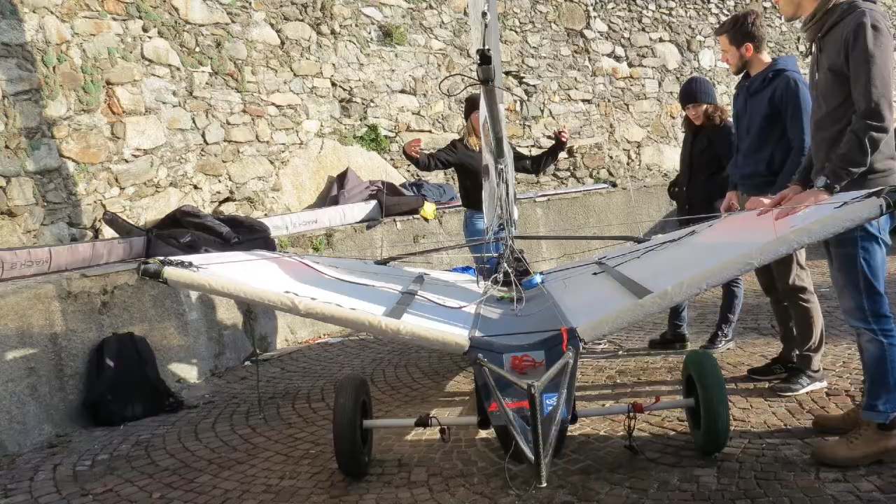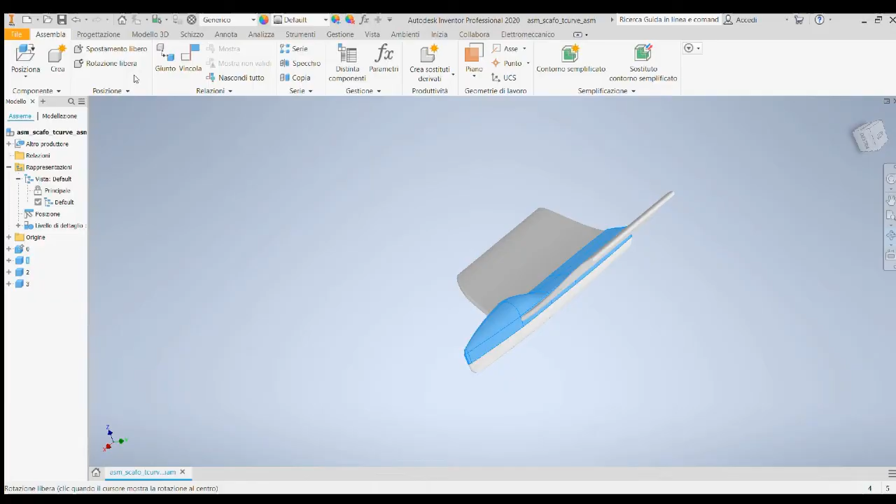The relations we built with partner companies allow us to use low-impact materials, such as bioresins and basalt fiber. Our design is based on small footprint, in particular from a perspective of reutilization of the parts. We take broken parts, we fix them, we test them, and then we use them in the new moth. We design parts and we want to produce them according to reusability, meaning that they could fit future moth designs. This way, we extend the life of each component.

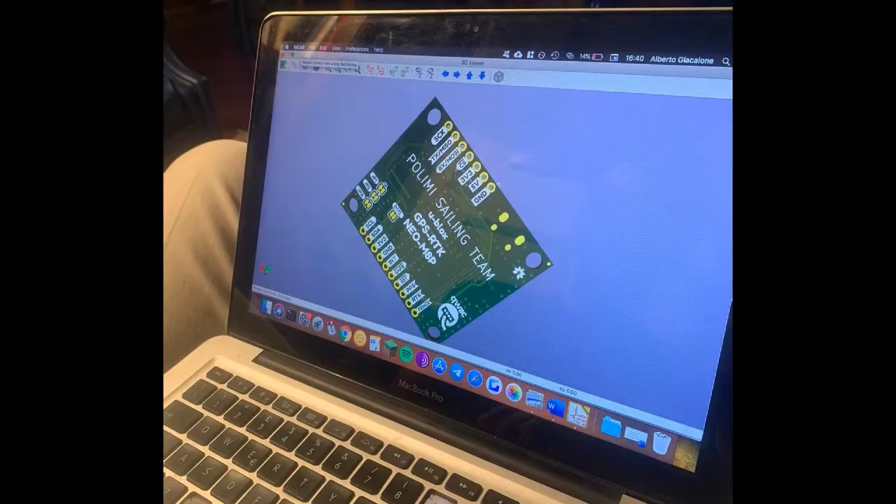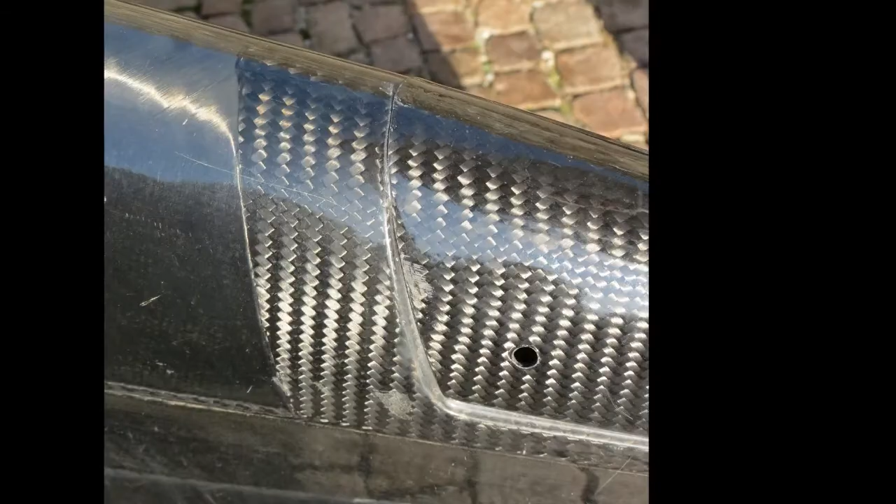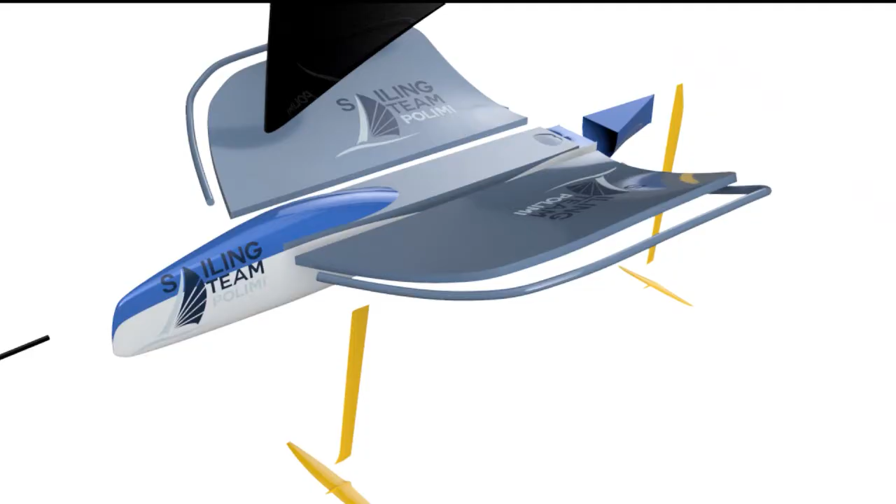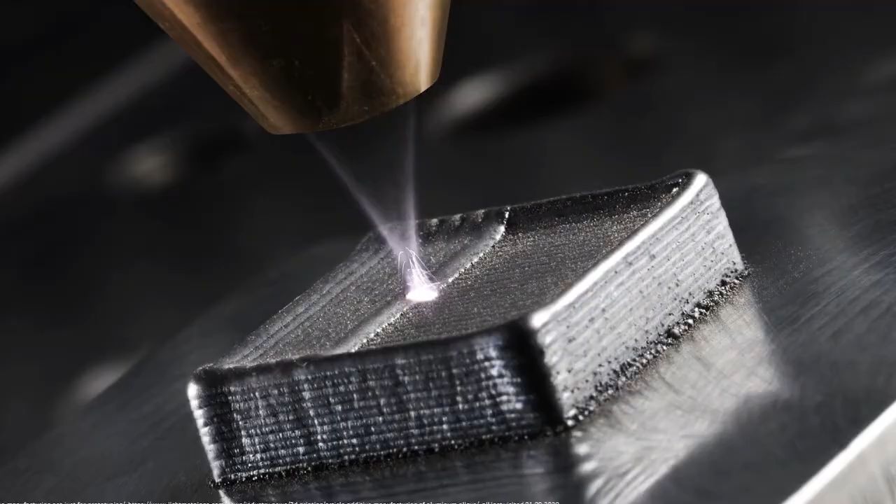Each moth module will be able to fit future moth design. This way, we forecast multiple lives for each of them. The joining techniques are designed to perform accordingly. For this purpose, additive manufacturing will be used to produce small joining elements to be inserted where needed to meet modules' geometries. Additive manufacturing, along with a zero waste approach, will involve sustainable materials such as aluminum and PLA.

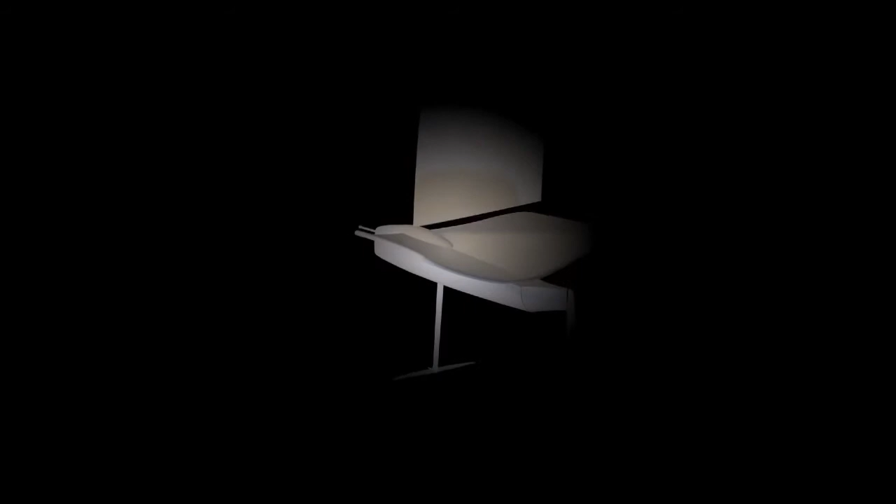Along with it, all moth modules must allow full disassembly for maintenance while in use, but focusing on our end-of-life sustainable disposal. Our moth will embrace innovative design solutions and manufacturing techniques, involving sustainable materials and extended end-of-life vision.

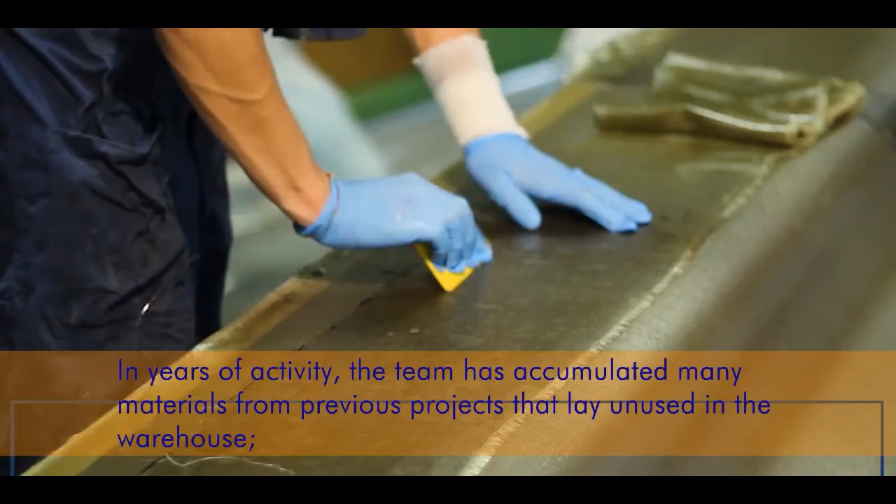Hi, I am Davide Sorli. I am a member of the Polito team and manager of our Sumoth project. In years of activity, the team has accumulated many materials from previous projects that lay unused in our warehouse. Our Sumoth has the goal of exploiting as much as possible these materials that would otherwise remain unused.

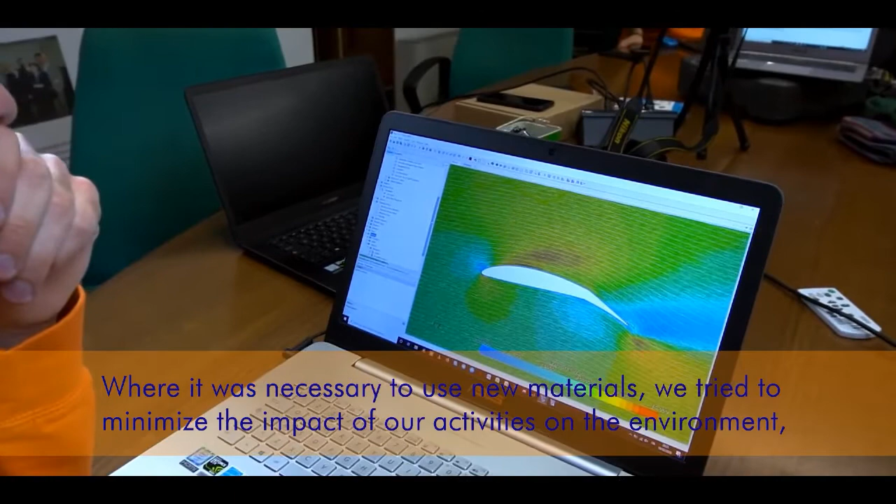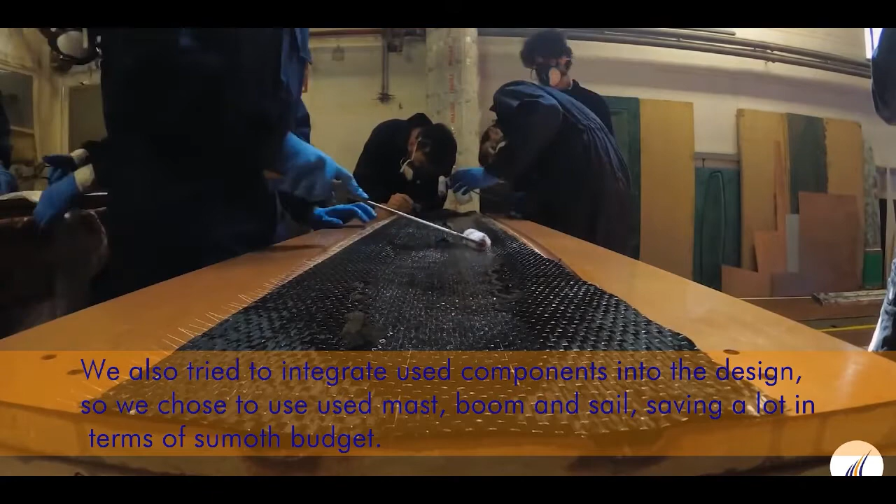Where the use of new materials was necessary, we try to minimize the impact of our activities on the environment, orienting the choice towards more sustainable solutions, like the use of a bio-based epoxy resin, which our team uses at every stage of the construction process. We also tried to integrate used components into the design, so we chose to use a used mast, boom and sail, saving a lot in terms of Sumoth budget. To fully grasp the Sumoth philosophy, we decided to also use materials that have reached the end of life.

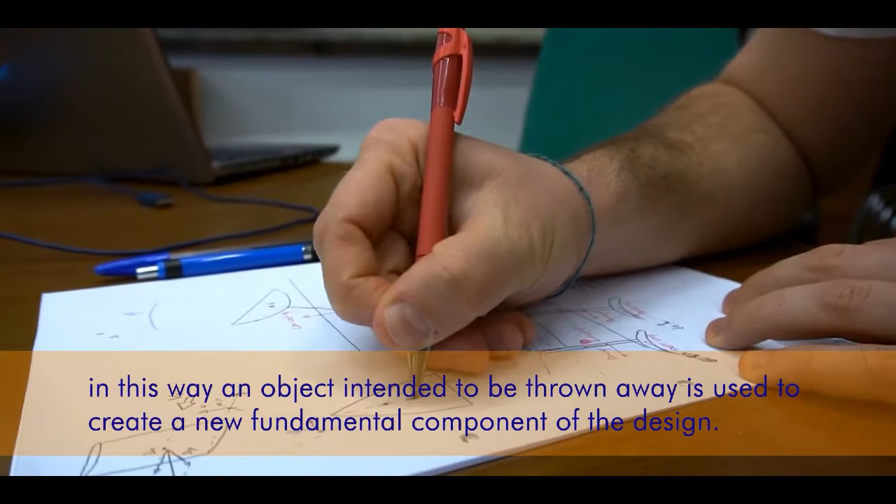It was therefore decided to use broken windsurf masts to create the wings, characterizing element of the boat. In this way, an object intended to be thrown away is used to create a new fundamental component of the design. The choices made have allowed us to use much of our budget on the appendages, which are the most complicated element to design due to the important stresses they are subjected to and the fundamental role they have.

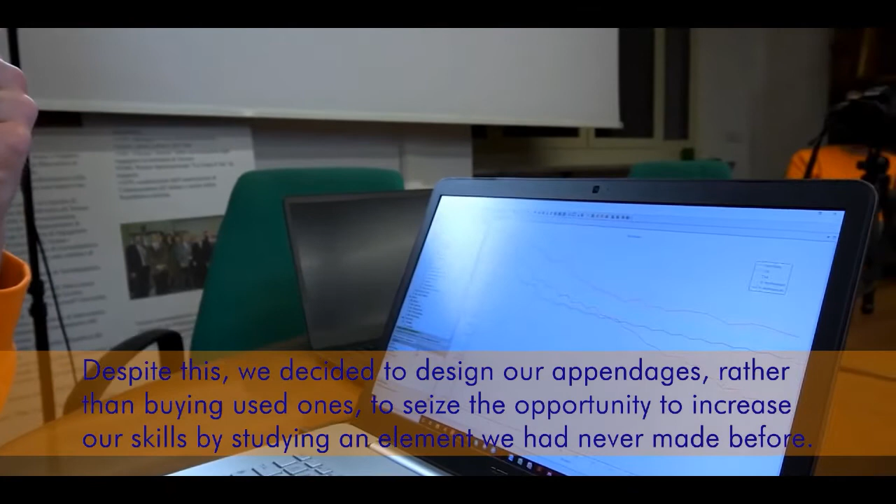The appendages must necessarily be made in carbon fiber and require a long manufacturing process, which takes many hours of CNC machining for the molds construction. Despite this, we decided to design our appendages rather than buying them, to seize the opportunity to increase our skills by studying an element we had never made before.

For the end of life of our Sumoth, we plan to recover all the fiber used in the hull and the deck using an innovative chemical process that we are developing. We also intend to recover carbon fiber used for appendages through already existing and well-known technological processes.

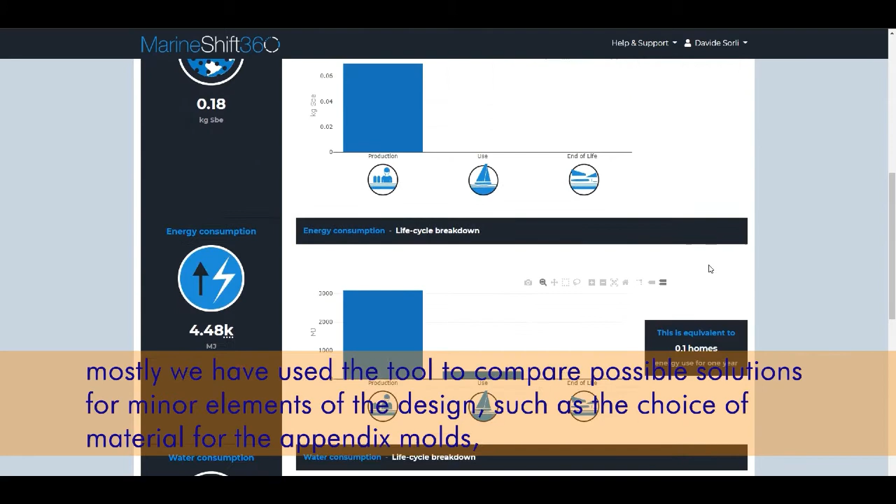The tool provided by MarineShift360 allowed us to compare different design solutions, choosing the way with the least impact on the environment. However, due to the design philosophy of our Sumoth, which provides as far as possible the use of materials that we already own and that lay unused in the warehouse, mostly we have used the tool to compare possible solutions for minor elements of the design, such as the choice of material for the appendix molds, considering the more important parts of the project substantially closed.

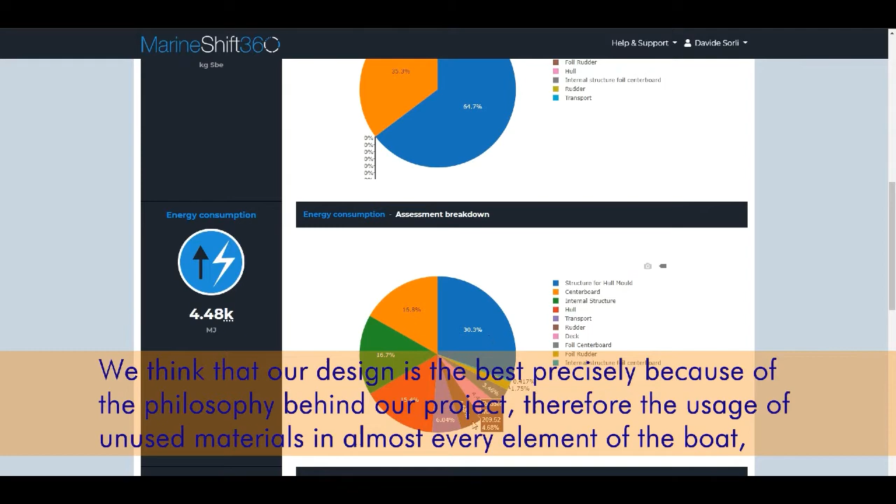We have used the tool more to verify the impact of the project, verifying that molds are the element with the greatest weight, thus providing for the possibility of improving these parts in the future using less impacting processes and materials. We think that our design is the best precisely because of the philosophy behind our project. Therefore, the usage of unused materials in almost every element of the boat, and, where possible, the integration of upcycled components from broken objects, an approach that we think fully embraces the idea behind Sumoth Challenge.

We also believe we have created a great project, a boat capable of sailing efficiently and balanced in all conditions, capable of withstanding the characteristic stresses of a moth and strong enough to be used for many years. This was possible thanks to the skills the team has acquired in its years of skiff design experience and the great commitment and dedication to the project by all team members. We hope that the COVID pandemic will end soon in order to allow us to finish the construction, so we hope to sail with our Sumoth as soon as possible.

Hi, welcome to our workshop here at ETS Montreal. I'm Pierre, I'm the co-captain of the Sumoth Canadian team Rafale. I'm here today to talk about the sustainability of our project.

Our main innovation is on the mold. We designed a symmetric mold that allows us to build the two parts of the boat in one single mold. Moreover, this mold has been machined in pine wood, that means it's totally recyclable. We also innovate on material. For the hull, we chose basalt fiber, which is made with volcanic rock. We chose a PET foam made with recycled PET. And for the resin, we chose the Arkema Elium resin, which allows us to recycle all the boats at the end of their life.

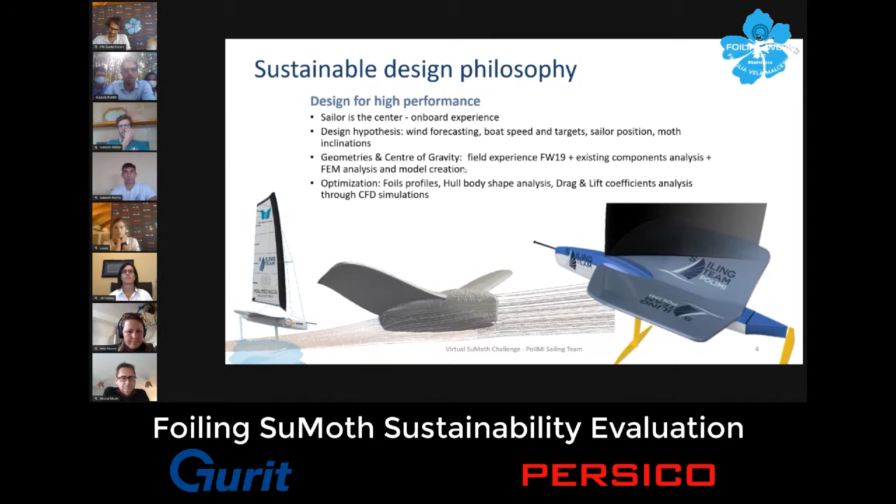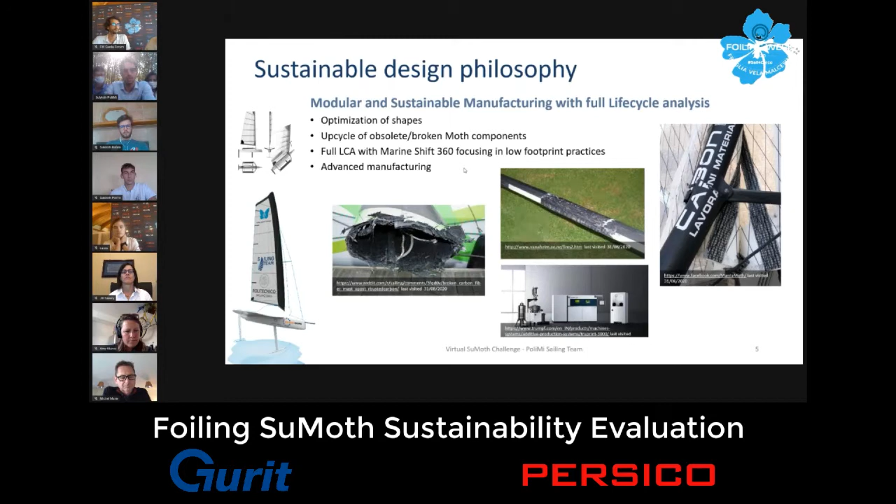With the design philosophy, we meant also advanced manufacturing, because in this way we go with a zero waste approach. In fact, advanced manufacturing focuses mainly on solving the conventional manufacturing problems. Along with, of course, the LCA approach that forces us to stay in a more sustainable condition. For materials, we analyzed biocomposite and sustainable materials. In particular, we want to recycle, and we want to use recycled materials that have been already used but can be used again.

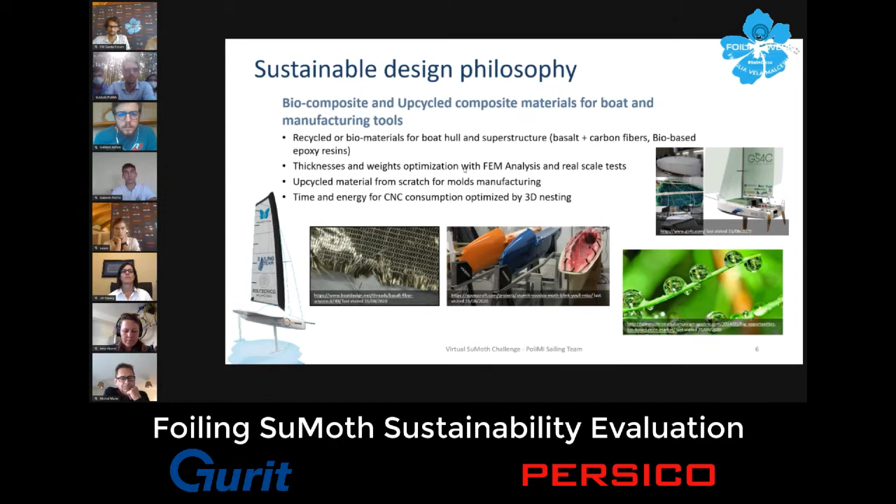For design philosophy, we meant also digitalization. That is something that is actually missing from the naval industry. In digitalization, we would like to collect as much data as possible for future innovation and for data analysis of real data from the experience that the sailor is feeling in the boat.

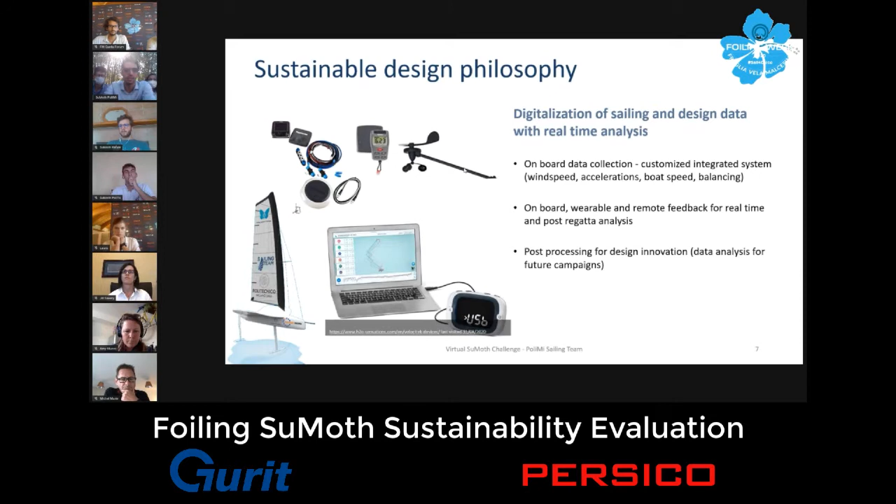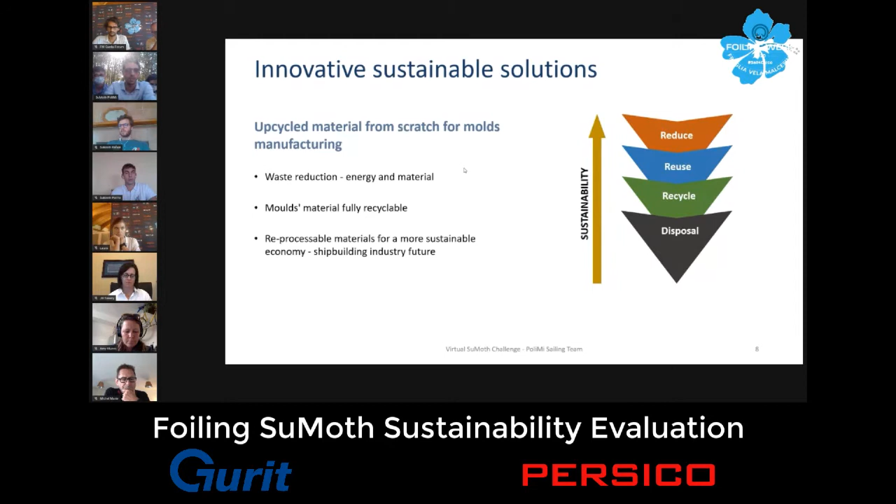So the innovations that we introduce are the waste reduction using advanced manufacturing, and the fully recyclable molds, mainly for the hull, in a fully recyclable material that will be collected by the providing company and can be reused 100%. For digitalization, we implemented a system of sensors in the boat itself, and it will be able to give us very important data along with what the sailor experiences, and the sailor will be able to see the data in real time.

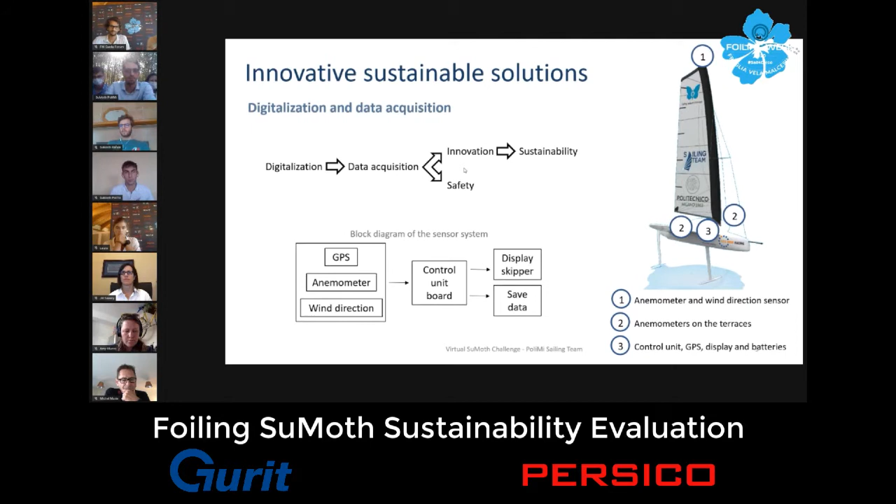For the design, we thought of each module as a separate one, in a way that the modules can be used for future designs. In this way, we extend the life of each module. And of course, the modules have to join with each other. In this way, another advanced manufacturing process came along, that is additive, and both metal or polymeric materials can be used.

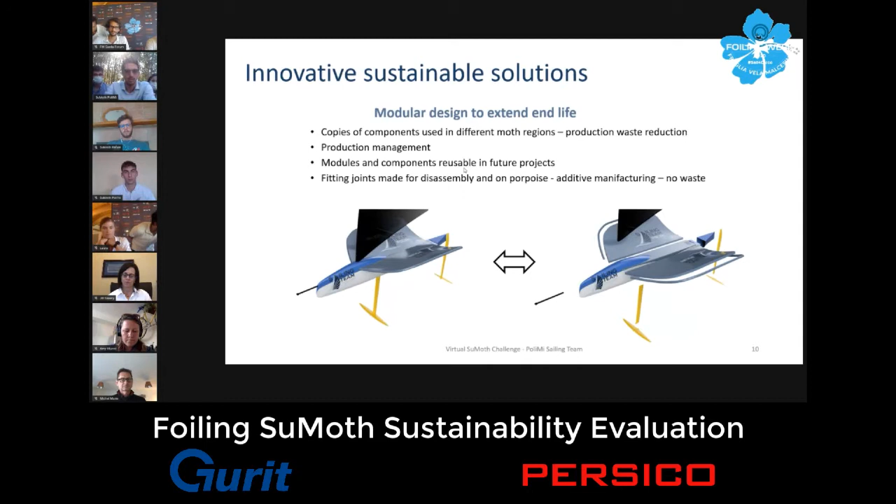Of course, additive manufacturing is a great advantage with no waste, because the only waste that one could have is the support structure. But if the design is pretty good, support structures are minimized. In fact, selective laser melting is one of the main technologies used, for example, for metal aluminum. And the idea is to use it both for structural components and also for non-structural ones.

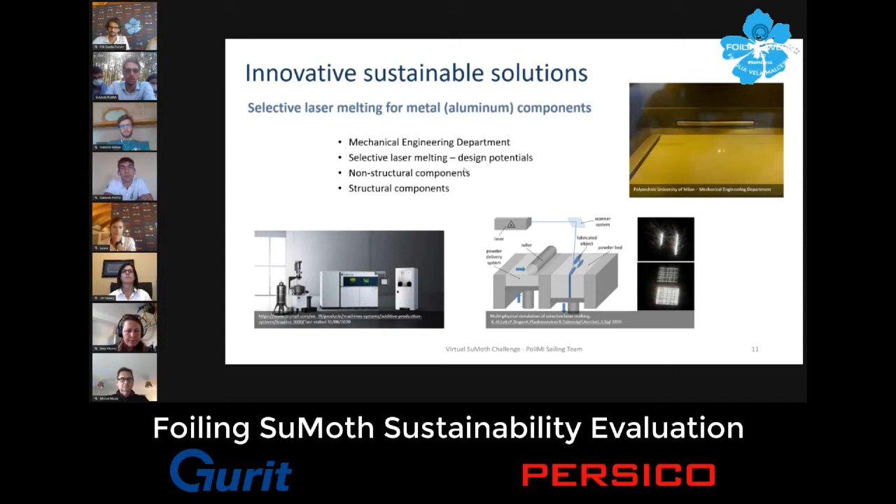Now, passing to the SuMoth dollar analysis, in a rough way, the main issue are the manufacturing processes. And we have seen it analyzing the overall budget that we are going to use, thanks to a tool that we developed for the SuMoth dollar. This tool, of course, takes the reference from the rules of the challenge. And as it is possible to see, the main causes of expenditure are the foils.

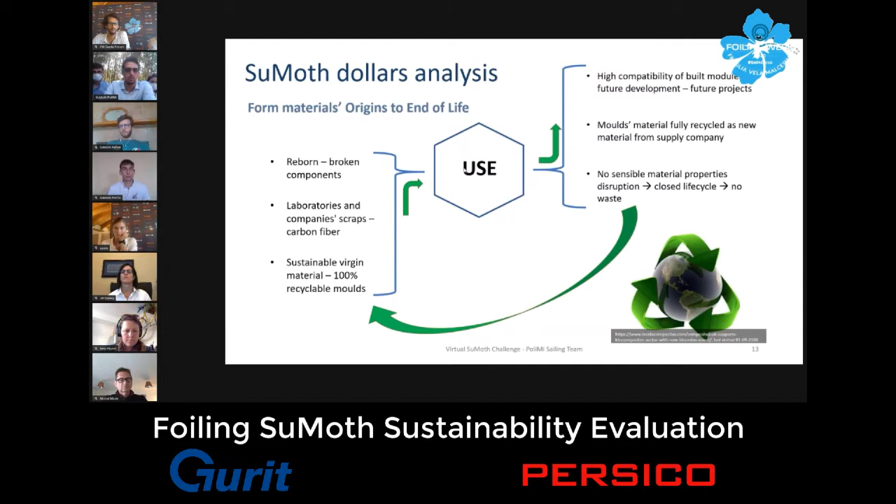This is due to the mold of the foils that has to be in metal, particularly aluminum, and due to the manufacturing cost, this will affect a lot. Of course, the SuMoth dollar analysis takes account of the broken parts that we consider in order to fix them and use them again, and the scrap that we're going to use, and the material that comes from a totally recyclable way, so a circular approach. In this way, the end of life of the components and the modules is extended, and the materials too. And also, of course, the waste is reduced as much as possible.

A particular thing that we want to report is that our contribution in new material, meaning the percentage of new material that we're going to insert in our moth, consists of about 1/3 of the overall budget in SuMoth dollars, but actually it accounts only for 2% of the weight of the moth. And this is really important because it shows the important focus of the challenge. We use only 2% in weight, but due to the rules of the challenge, it accounts a lot in our budget. It demonstrates that the challenge is really focused on what's really important, so sustainability and changing the way to take new material over the recycled one.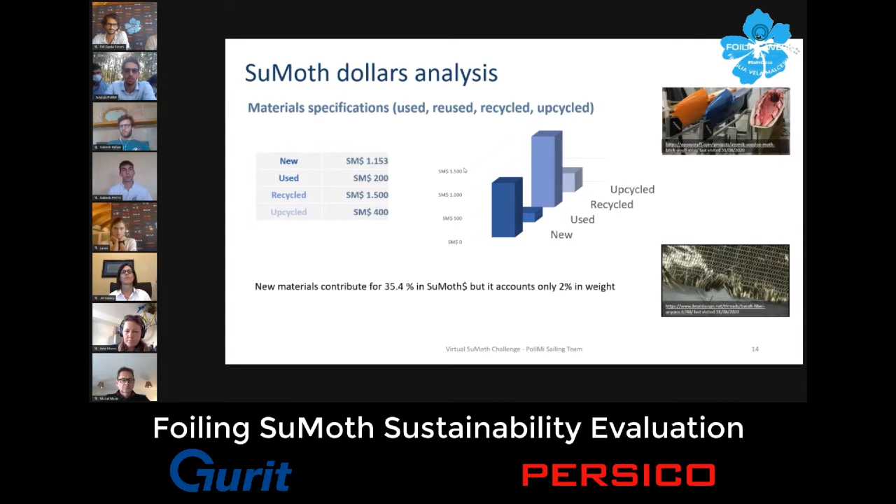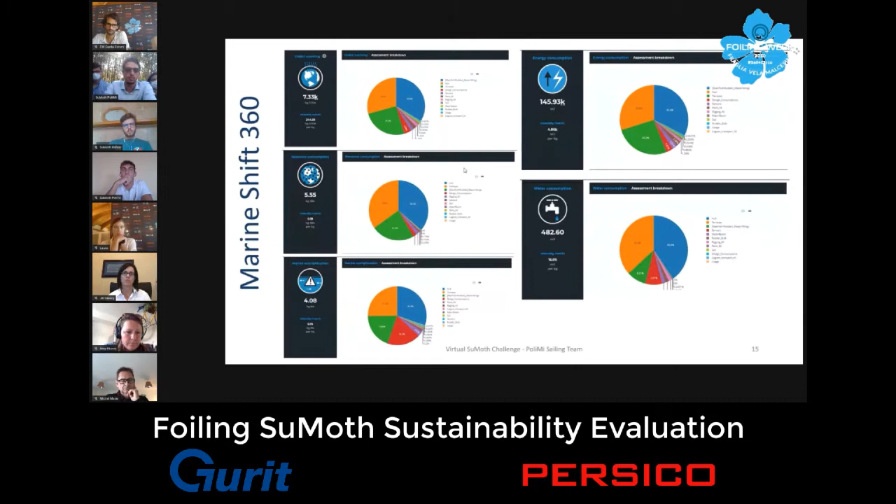Regarding the Marine Shift 360 analysis, as it is possible to see for all the 5 indexes that came across over the dashboard, the hull, the terraces, and the foils are the main causes of increasing the indexes, and this is due to the production. In fact, in the data, we have seen that the use and the end of life of those specific components are not even sensibly comparable with the production of these kinds of components.

What's next for us? Due, of course, to the pandemic, we needed to delay the design part, and we managed, for the end of the year, to finish both the overall design phase and the foil designs. And for the beginning of the next year, start manufacturing the final components, both for the hull and for the sail and the foils. Then, starting from April, we go to assemble everything and test. And thanks to sensors and all the testing that we will perform, we will have feedback to correct the inevitable errors.

So this is overall for us, but we are working even at distance, because here today we are in Polimi, but usually we meet thanks to platforms like Teams or Skype, but we managed to work in any case. I think that it is a really important target for us, even if the situation is like that.

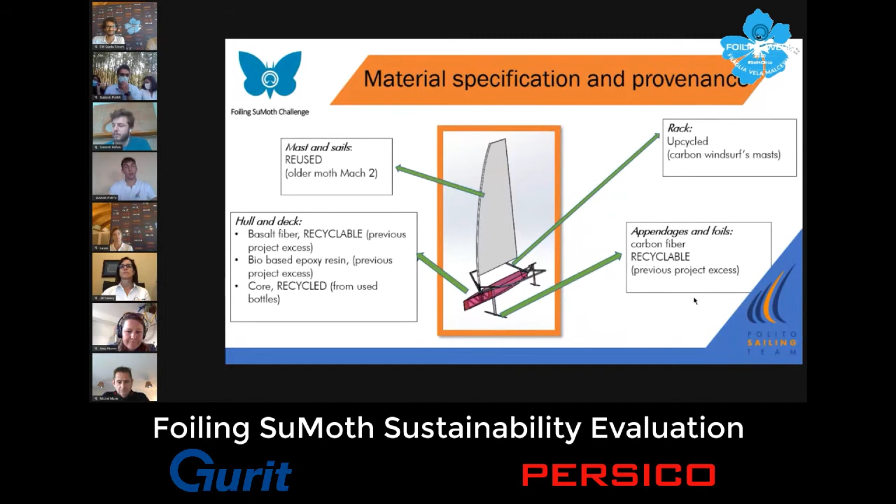At the end of life of the moth, it was really important for us, focusing on the end of life of our moth. Why? Because it was really challenging for us. We hope we will achieve a total recovery of the hull and deck basalt fiber through this innovative process that is under development. We are gonna recover the appendages' carbon fiber through an already existing and well-known technological process, and we come to reuse and upcycle all the remaining parts of the components.

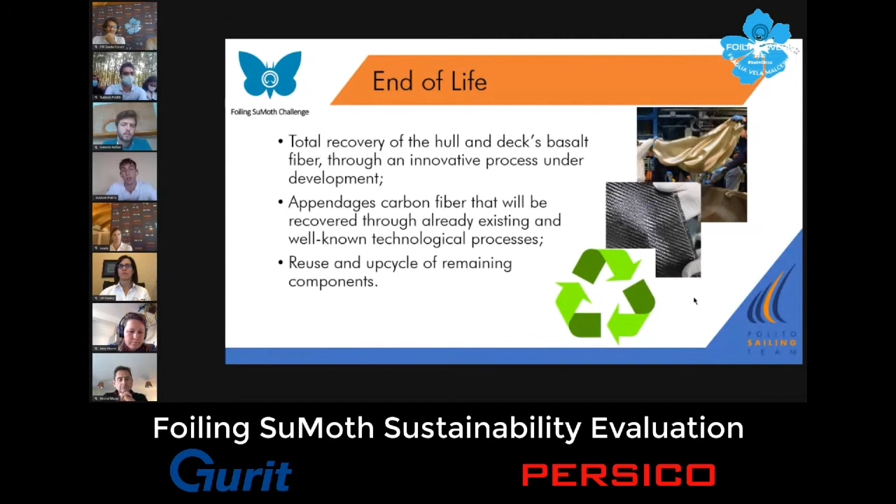The Marine Shift 360 helped us really a lot facing these issues, because it kind of built in us the awareness of the production of the boat, how important that is for the environment, and how it must be considered through the design process. In fact, most of the kilograms of CO2 emitted from our project is from the construction. Most of that is because of the CNC. Thanks to this, we are still trying to reduce this impact even more.

As we can see, the structure for the hull mold, the centerboard and the internal structure are the ones where we use CNC and the most complex processes. They are the most dangerous for the environment. So we are trying to develop them more. And that's all. Thanks for your attention.

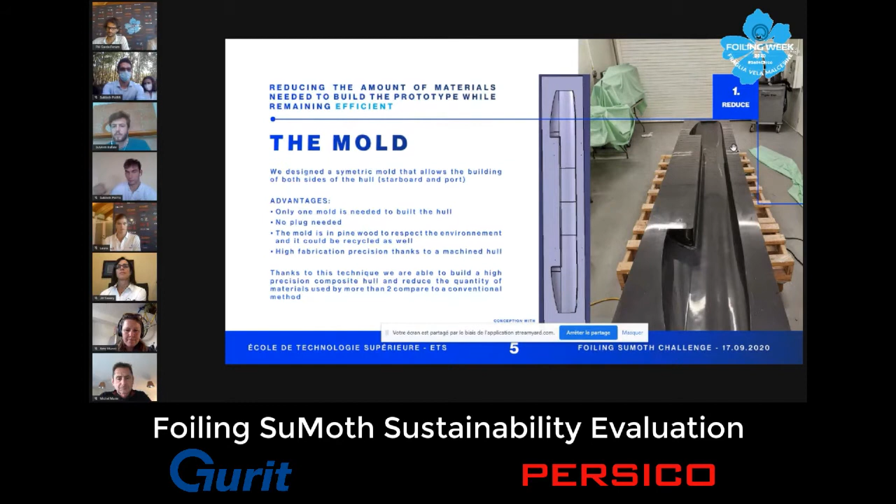So about the foils, we use prepreg carbon upcycled from Rafale 2, which is out of shelf life carbon, and we built with that a blank, and this blank will be machined to make our foils. So we don't make molds or plugs. We just use out of shelf life carbon and a CNC machine to build our boats. So that's a way to reduce the amount of material. And by the way, we also reduce out

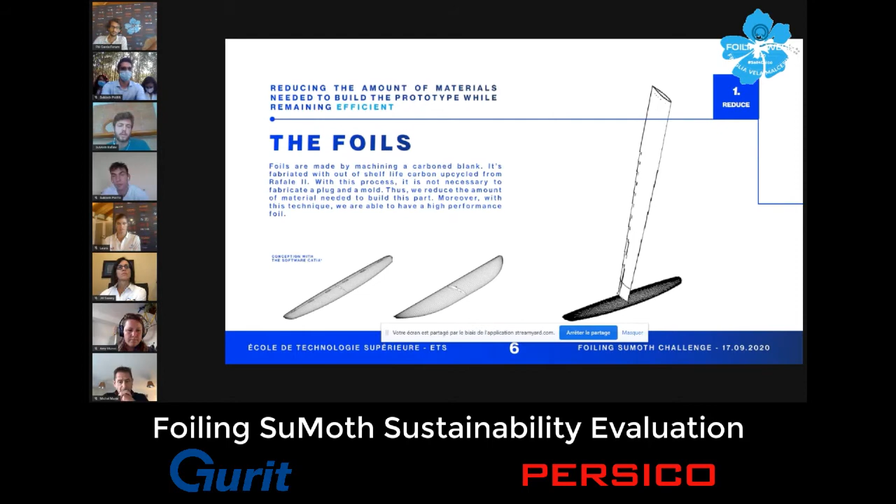of shelf life material. So about the wing bars, we also decided to reduce the amount of material by using aluminum folding process. So we just fold the aluminum tubes. So with this technique, we also don't have to make molds or plugs. We just need some aluminum tubes and a CNC machine to fold the tubes.

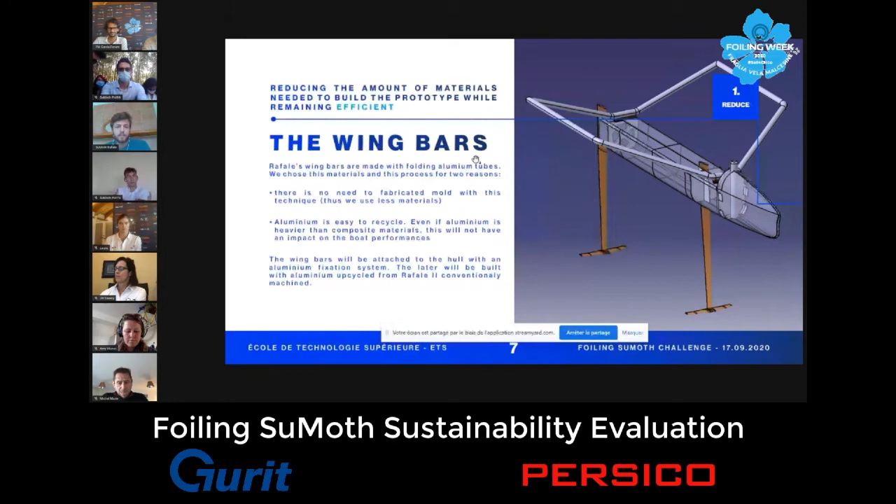So now about reuse and upcycle. So we reuse and upcycle a lot of elements from our previous projects. For example, the shafts of Rafale 3 will be made with the mold of the shaft from Rafale 2. So here are the two molds of the shaft from Rafale 2. So we adapt the design of the shaft of Rafale 3 with the design of the rudder of Rafale 2, the catamaran. As I said, the foils were made with prepreg out of shelf life carbon that have been upcycled from Rafale 2.

About all our consumables, they are reused from Rafale 2, such as the vacuum bag, the tape, the vacuum hose. Lot of elements are from Rafale 2. All the tacks, the blocks, and the pulleys also come from excess or upcycled elements from Rafale 1 and 2. We can see just over there is the hull of Rafale 1, and there are a lot of pulleys on it, and we will take them to put them on the Rafale 3, so the Moth Rafale 3. Our tiller is made with carbon tubes upcycled from Rafale 2. The ladder trampoline is made with the trampoline of Rafale 1.

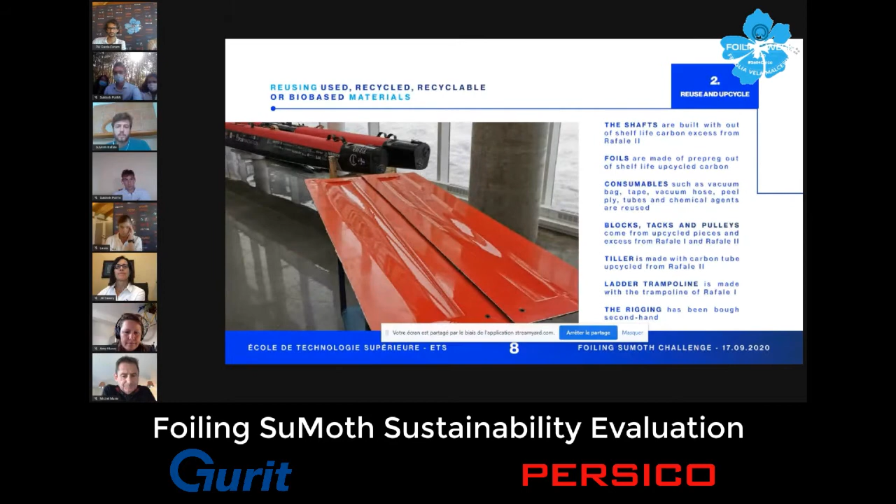So now let's talk about innovation on materials. So as the Poly team, we chose the basalt fiber to make our hull. At the beginning, we wanted to use the linen fiber, but this fiber was not compatible with the Arkema Elium resin. And so for the resin, we use the Arkema Elium resin, which is a thermoplastic infusible resin. So with this resin, we are able to recycle the composites.

And for the core, we use PET recycled core. So the basalt fiber is woven like 50 kilometers away from our school, where we make the boats. The core is made like 600 kilometers away, and the Elium resin is given by a composite research center, which is like 40 kilometers away from the school. So those projects are local projects.

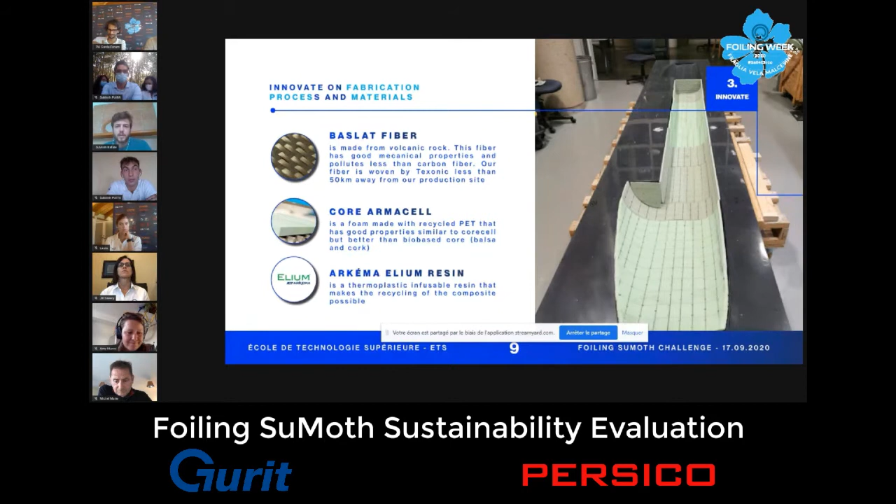So about the end of life, we think about short term and long term. So about the hull mold, as I said, it will be used to build other prototypes, or will be given to another student club. And about long term, it will be recycled because it's a 100% wood hull mold. And about the shafts, they are upcycled from Rafale 2, and when we have used them, we will give them to the new owner of Rafale 2, because the boat has been given to the skipper of the boat. And at the end of life, unfortunately, they will be buried under the ground because it's 100% carbon fiber and epoxy resin, so it's not recyclable at all.

About the hull, the rigging, the aluminum parts, and the carbon parts: at short term, all the boats will be used as a training boat or a reference for our future prototypes because, as I said, there is no Moth in North America. So none of us is able to sail a foiling boat. So we will need a training boat and a boat of reference to make innovation on the next boat. So Rafale 3 will be used as long as it can float, I think. And at end of life, the parts that can be recycled will be recycled, like the hull with the Arkema Elium resin, and parts that couldn't be recycled will be just buried underground, unfortunately, as for carbon parts.